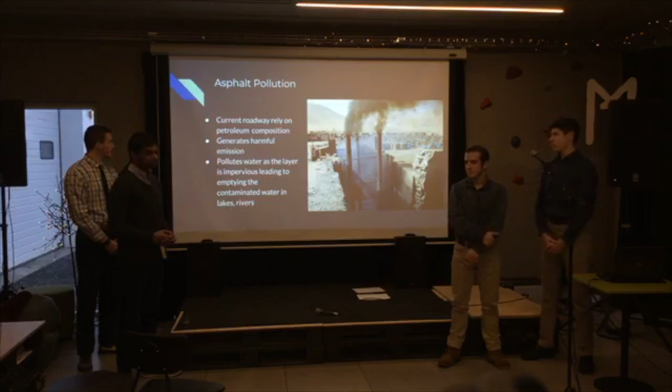Our goal with Grate Roads is to provide sustainable solutions to the problems Pratik just mentioned. Basically, what we'll be doing is making prefabricated road structures out of recycled plastics, mainly high-density polyethylene and low-density polyethylene.

We looked into using PVC, but because we will be melting down the plastics, PVC releases more dioxins, which is more dangerous. So basically what we'll be doing is collecting the recyclables, cleaning them, shredding them up, and then melting them down. Once melted, we pour them into molds and throw in some aggregate and bitumen, then let those dry.

This is quick, easy, and efficient compared to the asphalt process. We'll primarily be doing this in our factory, and we can make many pieces at once, regardless of weather outside or the project, without having to wait for construction companies to get the foundation ready. We can have stuff ready to go the minute those roads are ready.

And it is sustainable, so obviously we'll be using recyclables, and because they're different parts, for maintenance reasons we can take them out and recycle them, which makes it more sustainable. Our unique design is based on an idea that not many companies are doing right now, it's kind of a new concept.

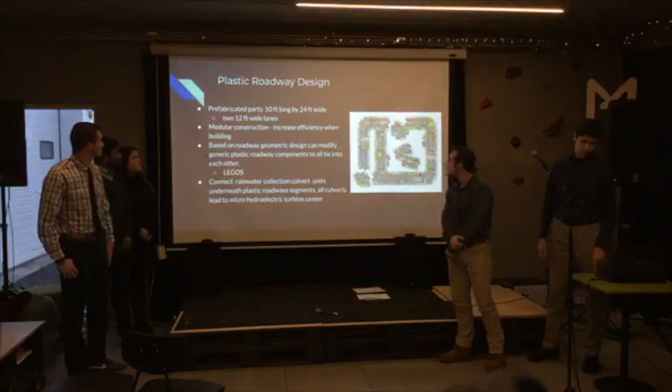Okay, so for our roadway design, as you all know, roadways consist of hundreds, if not thousands of miles of infrastructure throughout the world. By breaking our design into 50-foot increments, we can more accurately and precisely design each of the road segments to be able to tie into one another.

A good way to think of it is like a three-dimensional puzzle. You have to have each puzzle piece fit in with each other, along with each of the height elements being in the same dimension. That allows the geometric design of the road to all fit together nicely, all the cross-sectional slopes to be continuous, and no construction joints or bumps in the road that you would feel.

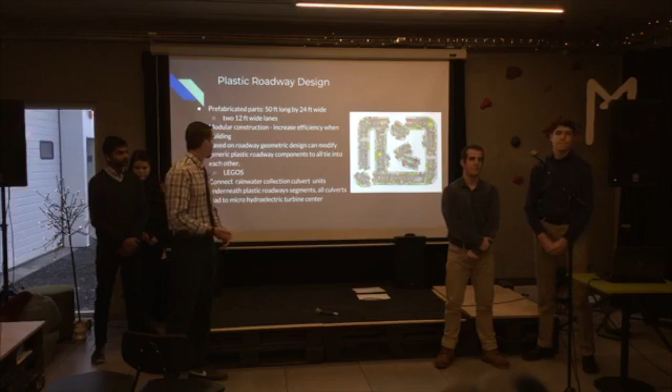Like Declan mentioned, our design consists of modular construction, which we would be prefabricating off-site, allowing for more efficient construction once they get onto site. Currently asphalt roads take months to construct, but our roads could be put together in a nice orderly fashion, one after another implementing those puzzle pieces, building the road in weeks rather than months.

And like I mentioned with the geometric design, they would all fit together nicely, and the hydroelectric rainwater collection culverts would also tie into each other.

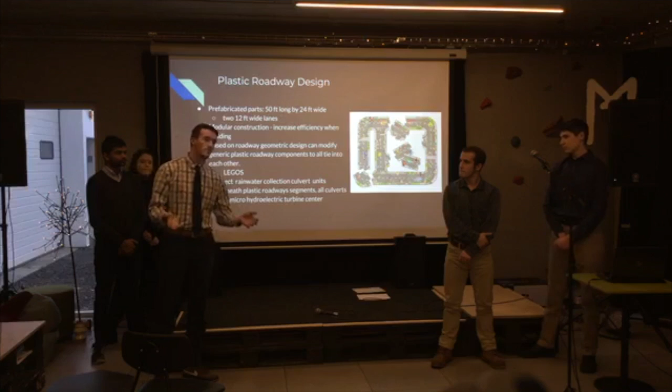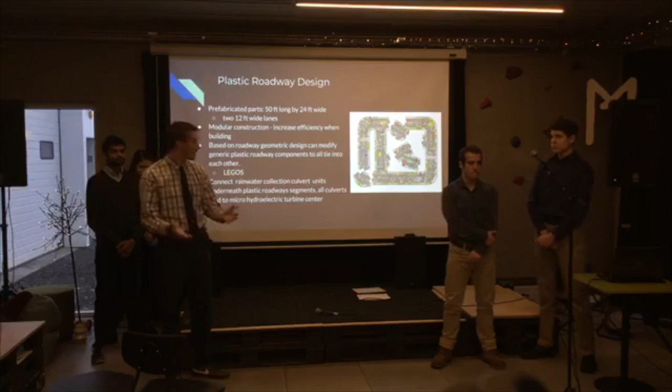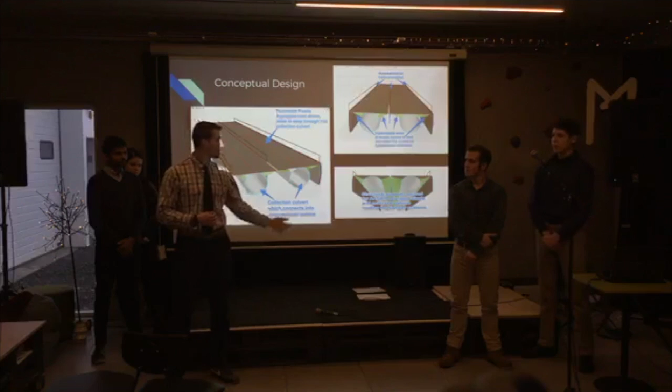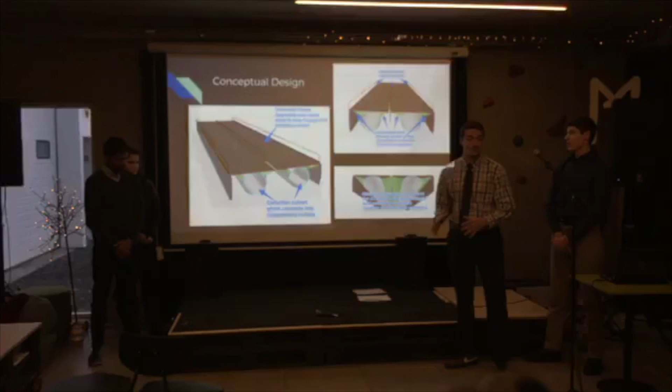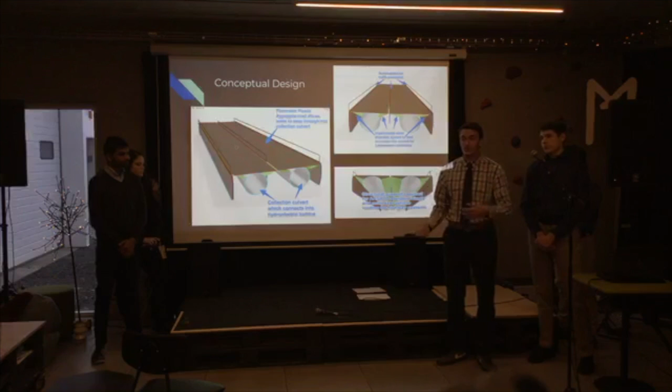One last thing is the structural support for all the roads. For AASHTO standards and other roadway standards, we need to be able to support the single and multi-axle loading of the roadway components. By having a mix of earth and backfill along with cement and possibly recycled plastic structural components, we would be able to support the load-bearing ability of the road and use minimal amounts of single-stream waste.

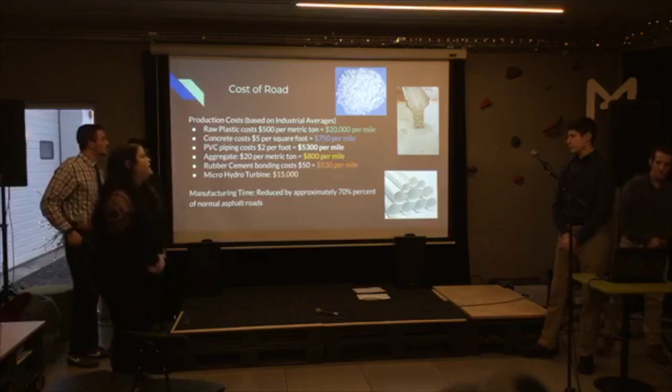For the cost, it's going to cost about $20,000 per mile just for the recycled plastics that we buy, and for the minimal concrete supports, about $750 per mile. The PVC piping under the road that collects the water is about $5,300, and the aggregate we mix with the raw plastic is about $800.

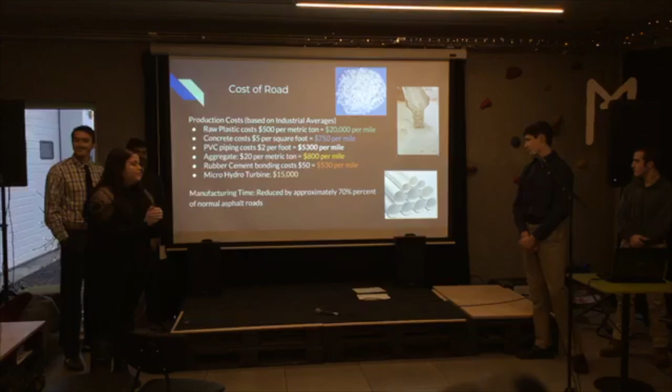The rubber cement used to bond the pieces together at the joints is about $530 per mile, and then Daniel's going to talk about the micro turbines that we're going to connect, which are about $15,000 each.

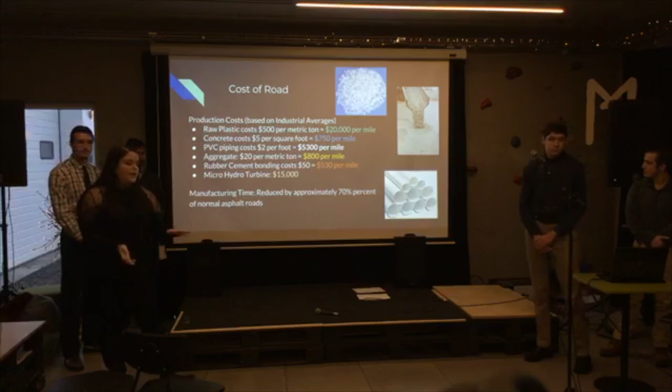But we're going to save money overall because, based on other plastic roads currently being developed and designed, we can estimate that our road will take about 70% less time to produce than a normal asphalt road.

Overall, we looked at how much a raw asphalt road costs and the finished cost of the road, which is about $4 million per mile. We used that structure factor to estimate that our road costs about $2.8 million per mile. But with that being said, it should install faster than a normal asphalt road, so we should save even more money than that.

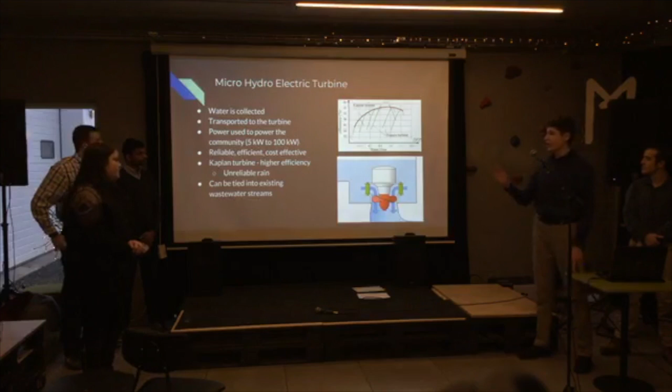With our road, we'd like to collect the rainwater that goes onto the road instead of just permeating off to the side. We want to collect it, transport it to a turbine, and with that water create electricity to power a small suburban community.

So what we chose was to use a micro hydroelectric turbine, which is best for the purpose we want to use it for. It's reliable, efficient, cost effective, and one of the cheaper turbines on the market right now.

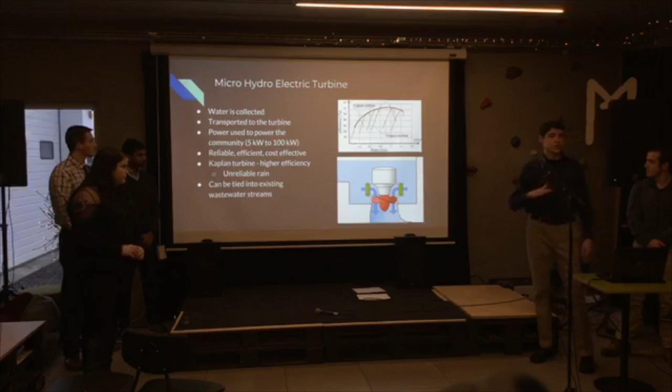With power generation, it's kind of intermittent because rain isn't always present—some days there's no rain, and some there's lots of rain. So we chose to use a Kaplan turbine because it has a more steady efficiency across a larger range of flow rates. Even with a little rain, the efficiency will be approximately the same as with a lot of rain.

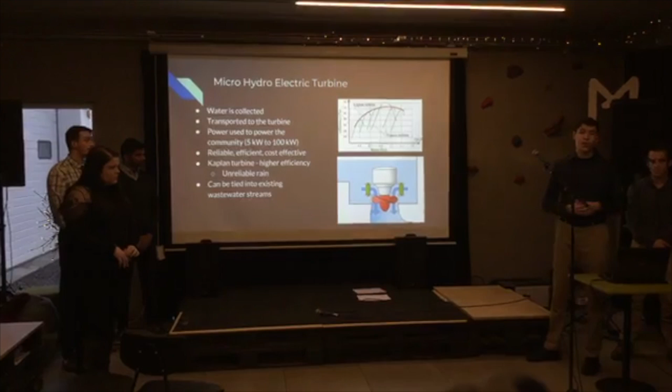After the water goes through the turbine, we plan on using existing infrastructure to place the water into existing wastewater streams.

We plan on testing this in Orlando. One of our main concerns was whether the pipes would freeze in colder temperatures, so we chose a warmer climate where hopefully that wouldn't happen. Orlando also has a fair amount of precipitation, which could lead to more hydropower.

There are also lots of highway and traffic areas in Orlando, so we're able to compare how well our plastic roads do in comparison to the asphalt roads currently there.

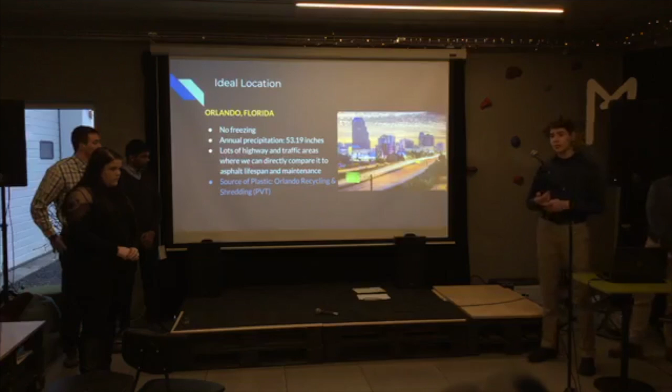Our roads are easier to maintain—if something is damaged or there's a pothole, we can simply remove the Lego piece of road, destroy it, recycle the material, build a new Lego piece, and place it back, which is very efficient.

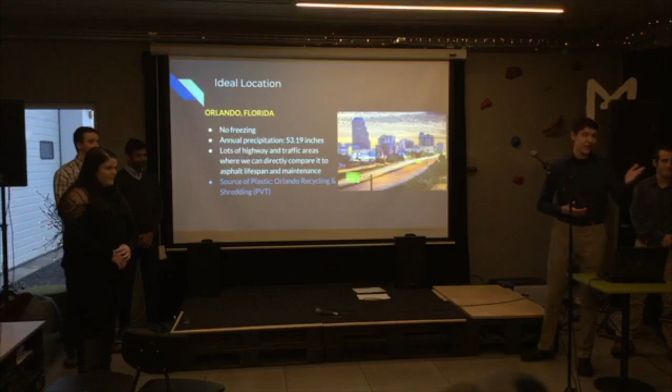We plan on taking plastic from a private company in Orlando that takes in recycled materials, or we could also use other private companies like Oceans Without Pollution.

For our distribution channels, we're hoping the city of Orlando wants to be more sustainable and advertise that, and will buy our product, which is also cheaper than an asphalt road.

We can build the pieces off-site somewhere in Florida, and they fit perfectly on an 18-wheeler, so we can ship them to site and install them where the road needs to be built.

The workers will install these roads with rubber cement, so no one loses their job—it's the same worker that would have paved an asphalt road, and installation is faster than asphalt. The energy we produce from the hydroelectric system, we're hoping will go back into the community where the road is placed.

Some potential problems relating to the design include the permeability factor through the roads. We'd need further testing to figure out what mix of plastic, aggregate, and friction course for cars to drive over would work best to capture as much rainfall as possible. Also, in the case of a 100-year or 25-year rain event with more rainfall than anticipated, we'd incorporate a spillway system to allow that influx of rain to tie into the existing drainage system, going off to the sides of the road.

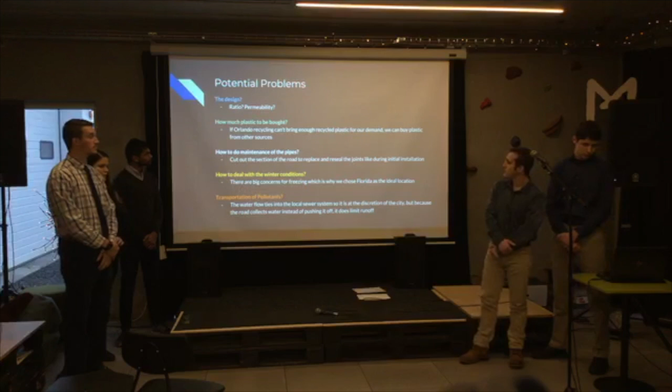Another potential problem was how much plastic can be bought. Depending on the different projects we get, we're not sure if the Orlando plant will be able to meet our demand, which is why we'd reach out to private companies to help us out.

Another thing to consider is how we'll maintain these pipes. Because they're in Lego pieces, rather than redo a whole road, we can find that particular area, take it out, and our pipes will be large enough to fit humans so they can perform maintenance inside.

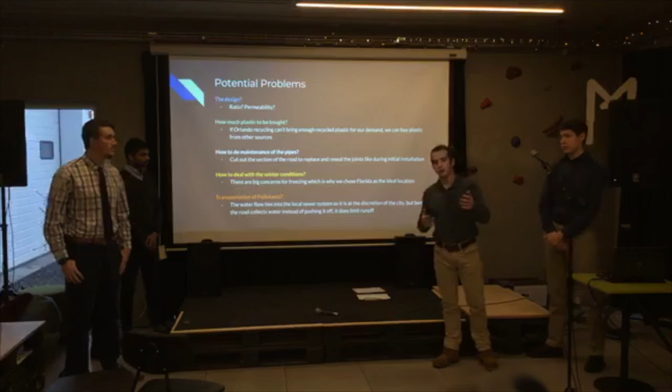And then how to deal with winter conditions. That was a concern of freezing, which is pretty much why we chose Florida. For now, we would want to base our operations in areas that have the same climate.

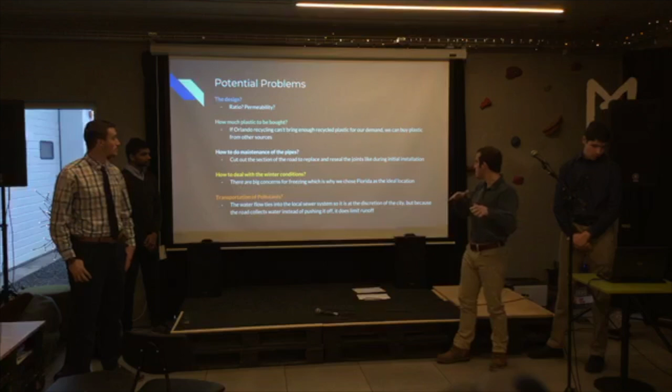And finally, the transportation of pollutants. The water flow ties go right into the local sewer system, so that's kind of at the discretion of the city, out of our hands. But because our road collects water, this will reduce and limit runoff.

And that's pretty much it. We do think this is feasible. This is kind of a new idea. There's not many roads like this in the world. I know there's a few companies in Europe that have done bike paths for 100 meters, but nothing on a really big scale. We do think this is feasible, and I'm looking forward to seeing the potential of this idea, not just with us, but the other companies doing it.

So if you get a pothole on the road, how much hold time would there be in replacing it? Hold time as in where we could remove that piece. How much time would it take for a new section of road to be put in, or would you already have a pre-made section to be put in?

That's a great question. What we could do is have a temporary pothole solution in place, which would require further research, but we could basically put a Band-Aid over it until the larger piece could be made, and then do a more timely and permanent fix to that problem.

So you said the roads were bonded by rubber cement. How would you dissolve that to remove the pieces of the road? Cut them. Just cut them? Yes, cut them. So is it interfitted, where you'd be cutting a piece on the other side of the road, or is it different? You would just cut it to make new seams, and then place a piece of the correct size into that seam to fit it.